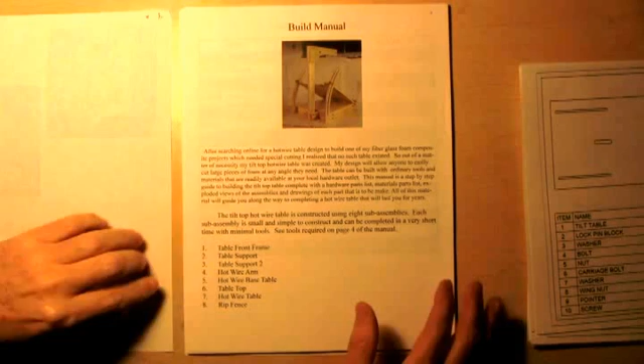And if you take a look at my blog site, you'll see a couple of the different projects that this table was used on. My foam composite trailer for my motorcycle, and also my three-piece triac foam composite kayak. This hot wire table was used extensively in both of those projects. So we're going to flip through here.

The tilt table is constructed of 8 sub-assemblies. Each sub-assembly is small and simple to construct and can be completed in a very short time with minimal tools. There's a table front frame, a table support 2, hot wire arm, hot wire base table, tabletop, hot wire table, and rip fence. This has a complete listing of what tools you need too.

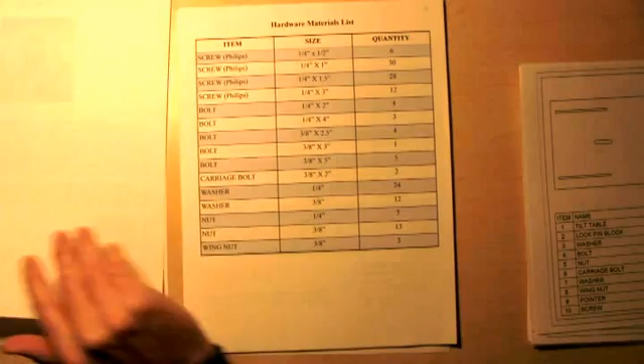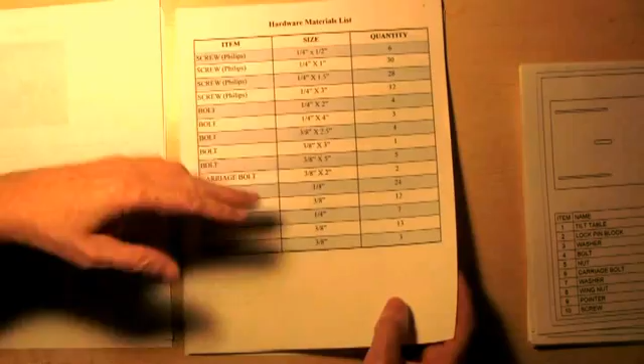This is the hardware list. It shows different screws, Phillips screws and bolts, carriage bolts, washers, nuts, wing nuts. Not a tremendous amount of hardware. Mostly it's wood screws here. I see there's 1/4 inch, 1 inch long wood screws. There's 30 of those. Washers, there's a couple of dozen of those. So again, there's not a lot of hardware in this project.

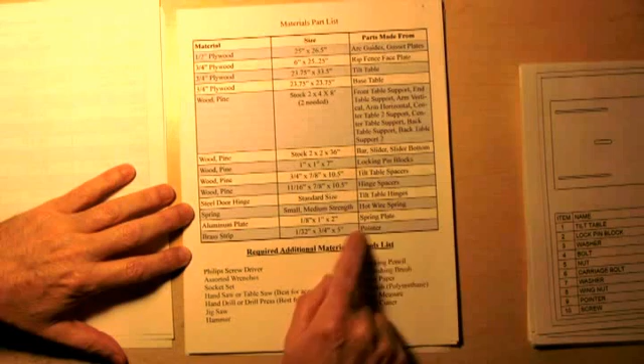Materials here for plywood, you have 1/2 inch and 3/4 inch plywood. Most everything else is made out of stock 2x4s and 2x2s, and a little aluminum plate, and we'll see this when we go through the manual. The pointer is made from a brass strip. Steel door hinge. It's a standard hinge you get from any hardware store.

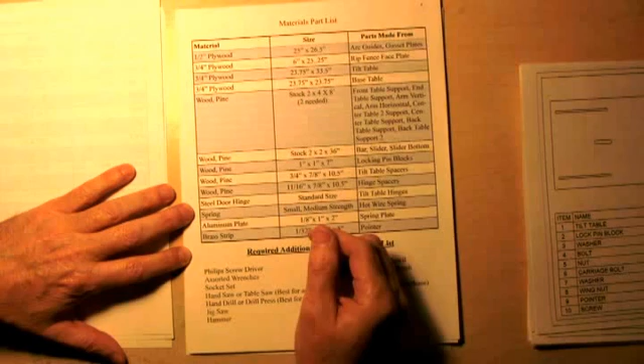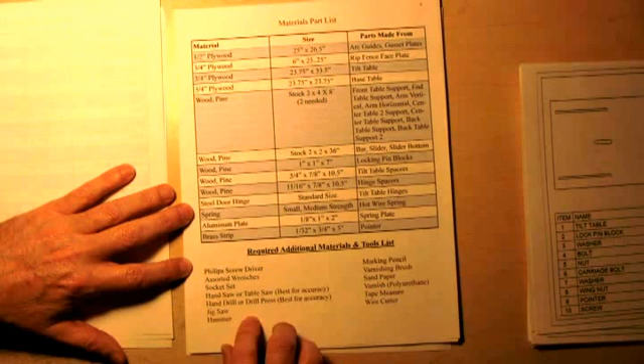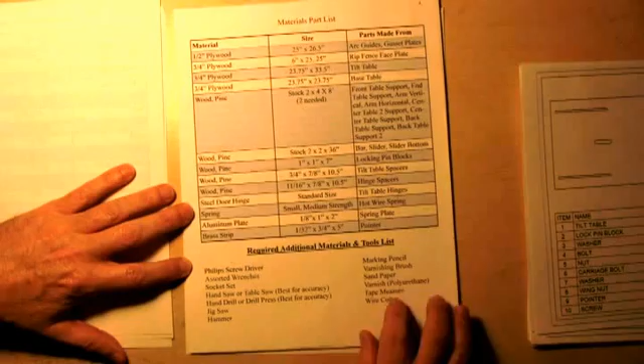And let's see, this is the tools list. It has a Phillips screwdriver, assorted wrenches, socket set, hand saw or table saw, best for accuracy, a hand drill or a drill press, again drill presses would be better, a jigsaw, a hammer, marking pencil, varnishing brushes, sandpaper, varnish, polyurethane varnish works fine, tape measure, and a wire cutter.

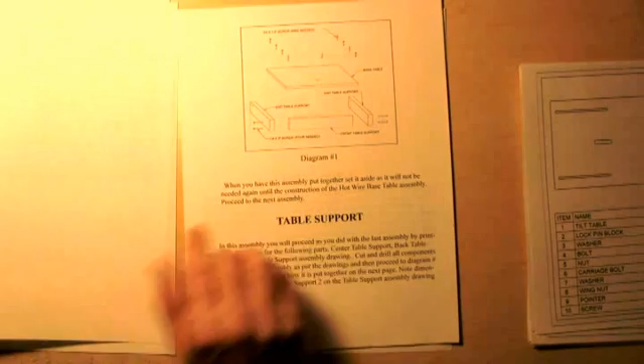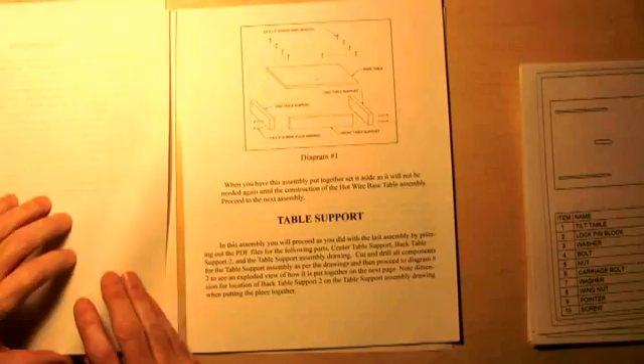This is the table front frame. These are the instructions that tell you what's going on here. And in this manual, we'll go through the drawings along with this. These are all exploded views and different diagrams that show you how to put together the table front frame. And then it goes into the table support. Again, 2 pieces for a table support, couple of screws, real simple construction.

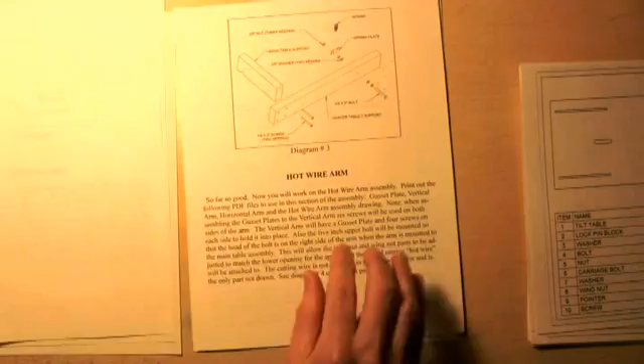Table support 2, same process, only 4 screws and a couple of parts. There's a little spring plate and a spring, and washers, and again it's all diagrammed very well and explains exactly how this all goes together. This is the hot wire arm. Again, it's just a couple of 2x4s and some mating gusset plates. And it's all screwed together, and then it's all bolted to the lower assembly.

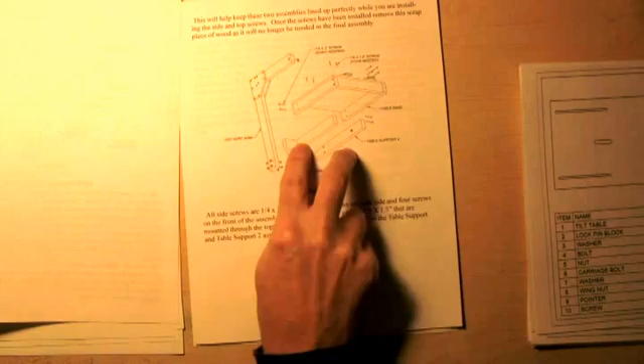This next section is the hot wire base table. And here's the arm again, and then these are the 2 sub-assemblies that we just talked about, table support 1 and 2, and then the table base. And this shows how it all gets bolted together.

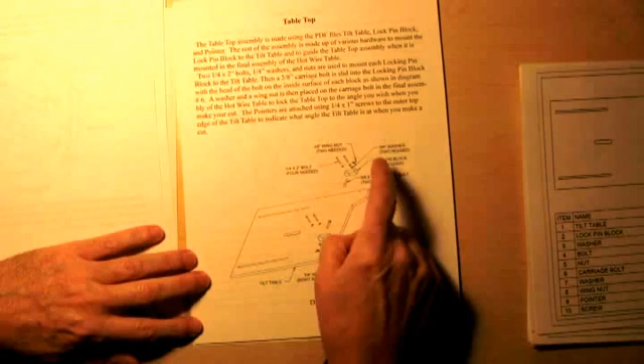This is the tabletop itself. It's the tilt table mechanism itself, and it shows the different hardware that goes into it. 3/8 inch by 2 carriage bolts. There's 2 of them, and then it shows the instructions very plainly here. It's very well illustrated.

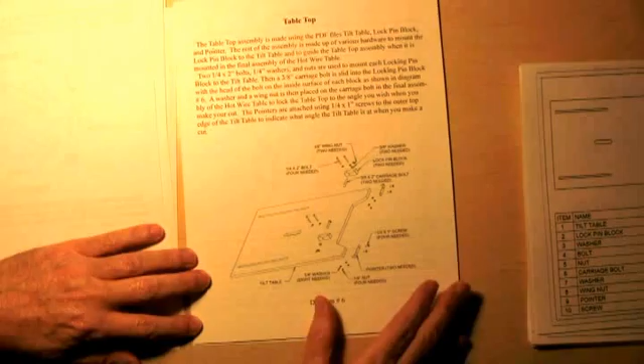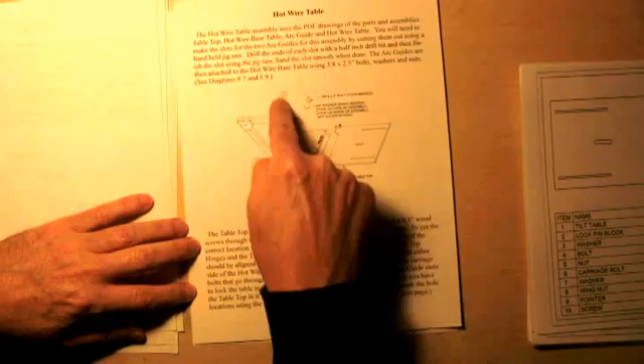This is the hot wire table. Actually, this is close to being built here already. These are the arms, the arc guides to show the angle of the tilt for the bed itself.

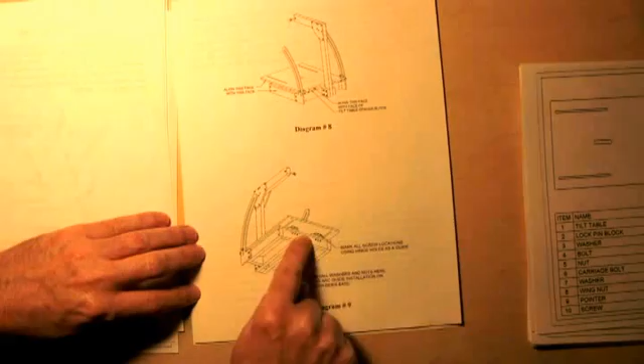Here's a couple more good diagrams of the machine, the hot wire table bolted together and assembled, and shows how to mark the screws to get the screws lined up right so this bed will tilt correctly. Again, another diagram with the placement of the screws and a little block in here to get your height right.

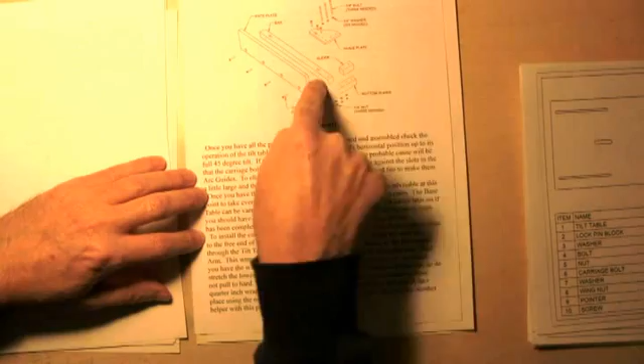Then you go into the rip fence. There's a rip fence on this. Go to the next page here. There we go. Here's the rip fence. And again, it's nothing more than a 2x2 and then a plywood face, and it's all screwed into the 2x2 with a couple of gusset plates and some smaller blocks.

These are just some clips for the wires that come up to power the hot wire table. Some photographs of the arms with the labeling on them, and the little guide. It's just a little metal strip that can easily be cut with a tin snips and bent into shape.

Here's the actual guides. This gets blown up to the size that you need for the arms. And so you take it over to like Copyworks or Kinko's, and they can blow this up to the size that you need. It's not to scale in this drawing, but once you blow it up, as long as you get this an inch wide, when you finish, it'll be the right size that you need. So you got a right side guide and a left side guide.

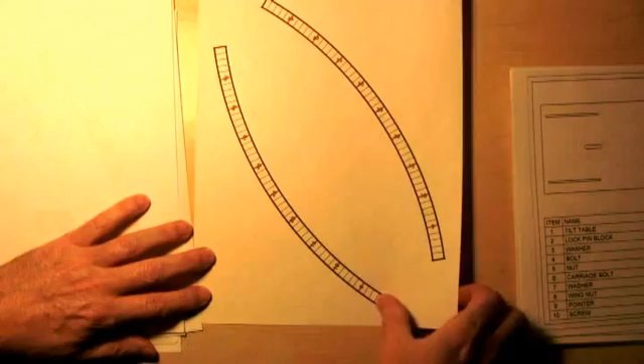And here's another set. It looks a little different. You may like it in color. Again, there's a left and a right, and just scale it up so these are an inch wide, and they'll mate up on the arms very, very well. So it's a very quick assembly from what I designed. And we'll jump forward to the drawings.

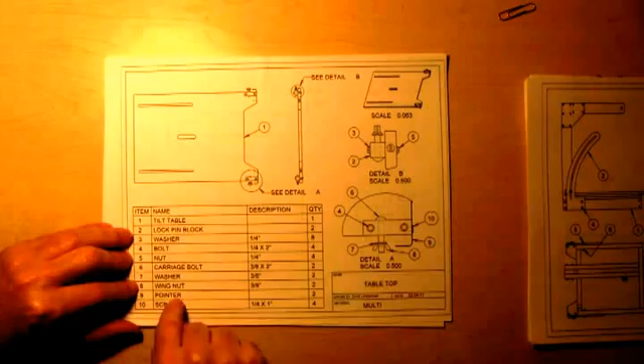In the plans, you have a complete set of drawings showing you all the dimensions for all the parts. This is the assembly drawing of the tabletop itself, and it shows all the miscellaneous components and a listing of what parts go where and how it's assembled. And this is the tabletop, and this is your little pointer. Again, it's just made of brass or aluminum, and you can just cut this with a little tin snips and drill it out, and it's real quick and easy to bend.

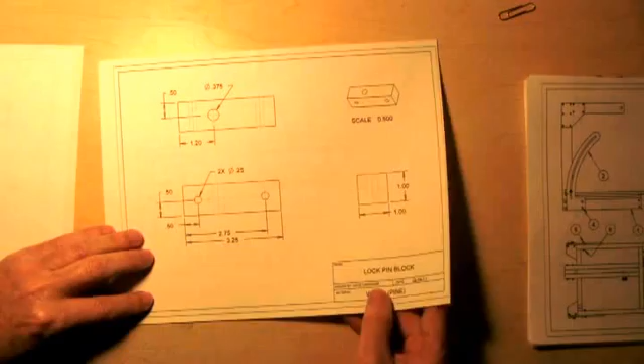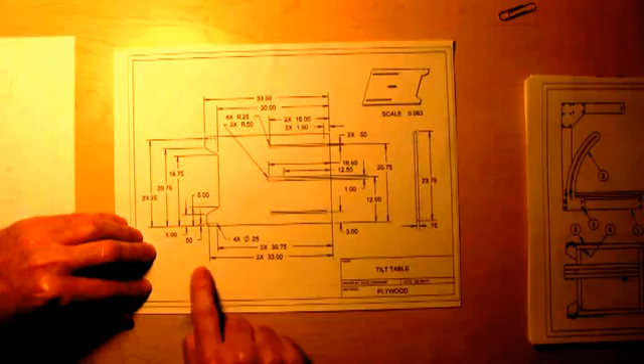Here's some of the locking pin blocks, and these are just made out of pine, and they're 1 inch square. It gives you all the dimensions you need. This is the table itself, and shows the slots that are in here and how far apart. You drill a couple of holes and then take a jigsaw and cut those slots out. Same with this big one in the middle. But it's all dimensioned very well. This is 3/4 inch plywood, so it's a very solid table. So that gives you the tabletop assembly. Let's go to the next section here.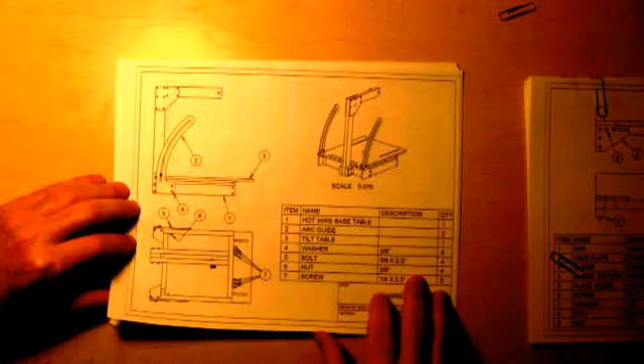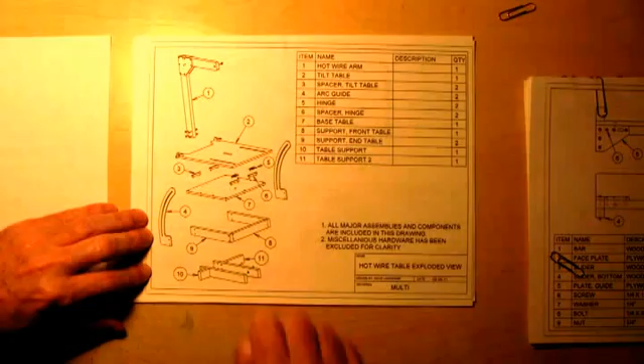This is the hot wire table again. This shows an overall construction of what parts go where. This shows where the hinges are and what various components are in the assembly. An exploded view, and shows the different sub-assemblies that are in it. Here's the framework and the table itself and the arm and the guide arms. Again, more sub-assemblies. Shows where everything is at, so you can take a look at these and get a much better idea how this is all put together.

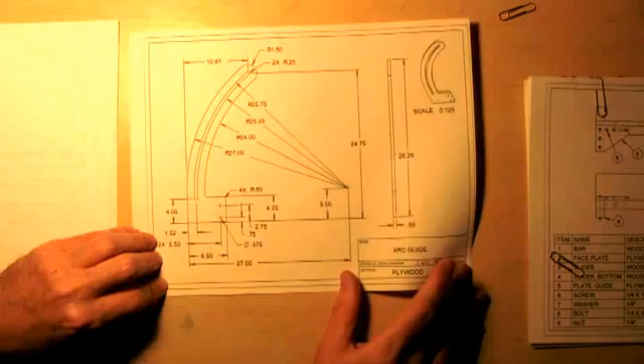Here's your guide arms. Arc guide, actually, there's the correct terminology. And it shows you how to lay this out. Simplest way is to follow the directions: you put a pencil with a string, and you can make these arcs just the way it is. It's all dimensioned, it's all right up to industrial standards, so that you can get something that's made that'll last you a good long time.

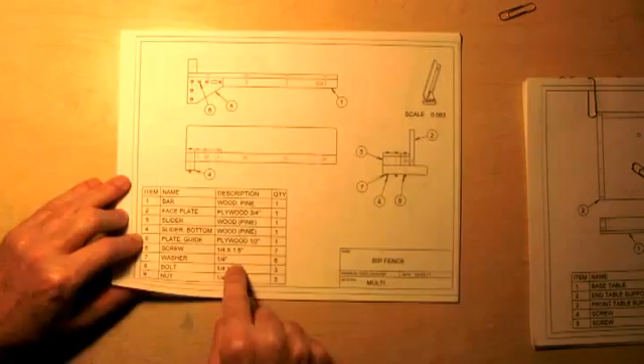So the next thing here we're looking at is the rip fence. There we go, there's the rip fence. We've got, again, a complete assembly of the rip fence here. It tells you all the parts that are in it. And that's a breakdown of each individual component and how to make it. Most of this is made out of just straight pine. Just very simple construction.

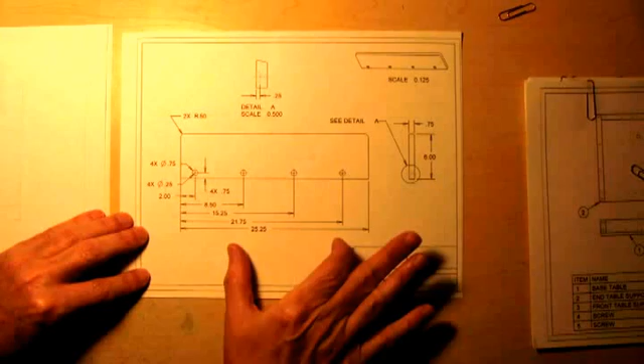This is made out of 3/4 inch plywood, and it is 6 inches by 25 1/4 inches long. Again, it's very well dimensioned. It shows you every last little detail you need to make the assembly. And then the little gusset plates that are 1/2-inch plywood, and it shows all your holes and diameters that you need to drill through to put the screws in and make the assembly for the rip fence.

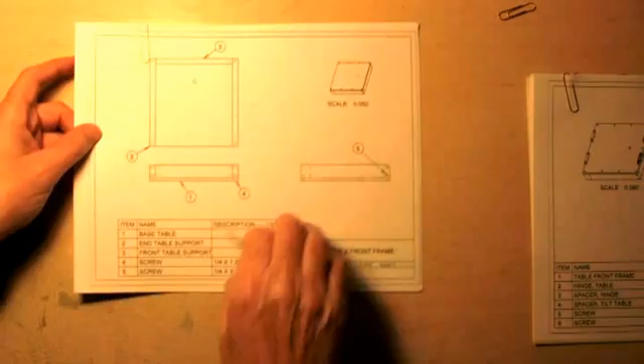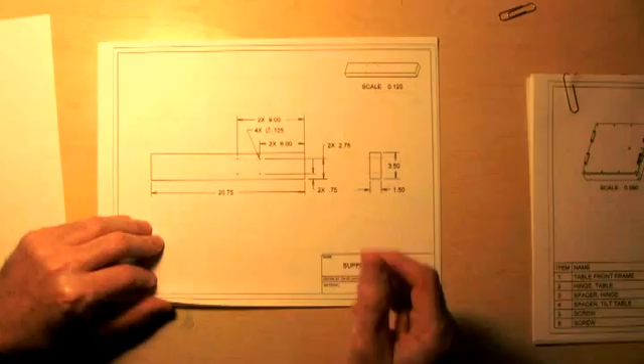The next one here is the table front frame. Again, it shows the entire assembly and a breakdown of all the components in the assembly. And then again, just piece by piece. These are nothing more than standard 2x4s, and this piece is only 20 3/4 inches long, standard 2x4. And then it shows 4 holes that are drilled into it for mounting.

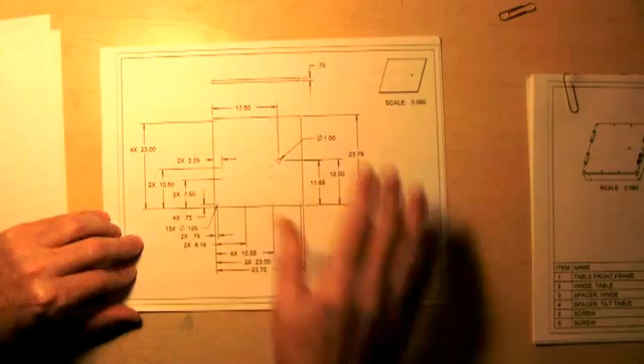This is 3/4 inch plywood that is 23 3/4 inches square. And again, there's a few holes in here that are drilled out. You follow the directions in the manual, and it has all the dimensioning you need to lay this all out. Again, here's the support for the end table. It's just a 2x4 with about 6 holes drilled in it. Very, very simple construction.

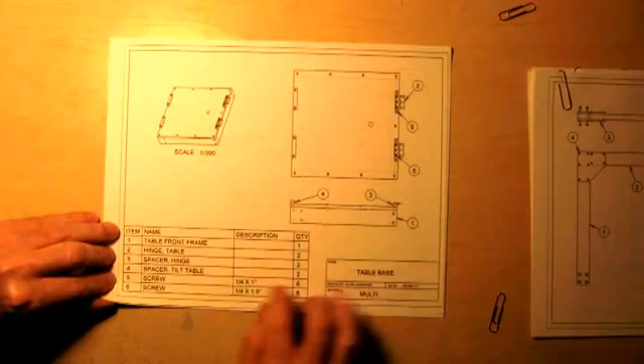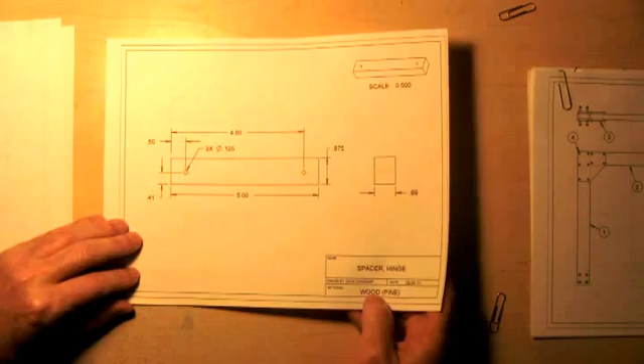The next section is the table base. Again, here's a 3D view of the assembly and all the components laid out. Tells you exactly what's what and a complete description of what's in it. And this is the tilt table itself, a spacer. It's nothing more than pine, and gives you a dimension 0.875. Again, this is all in the manual. Tells you step by step how to do this. But all these drawings help a lot. Tells you piece by piece exactly what dimensions you need in order to put this all together.

Here's your standard hinge, just a regular door hinge. Nothing special. You can buy these over at Lowe's. Get one comparable to this one. If you're off a little bit, it would not hurt at all. It's just to make the tilt mechanism all work. Very, very simple to do.

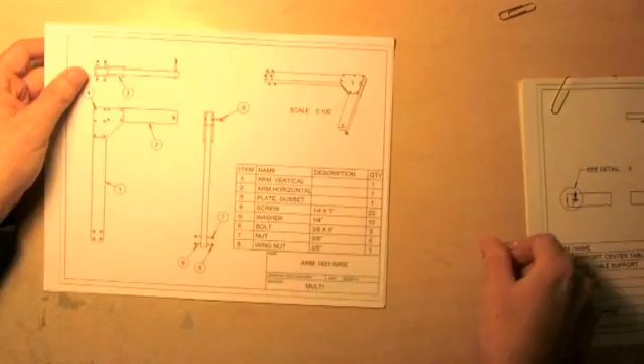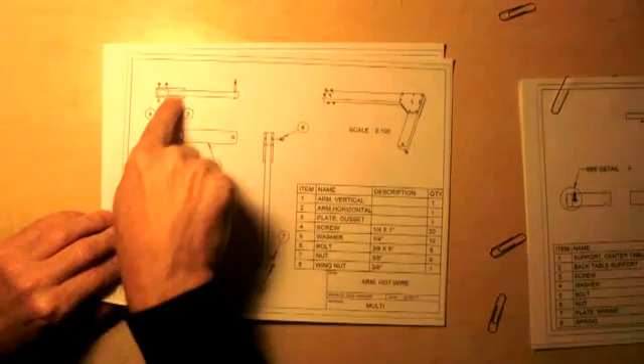So the next section here, let's see what we got. This is the hot wire arm itself. It's an arm like this, and then a wire comes down, so you can cut your styrofoam, and it works very, very well. An arm with a couple of gusset plates. It's just two 2x4s, and then they're bolted through. You can see the bolting that goes on in here. But again, a complete list of what's in the assembly and a breakdown of each individual component, piece by piece. And it's mostly just 2x4s and gusset plates and a few screws and some nuts and bolts down in the lower section here.

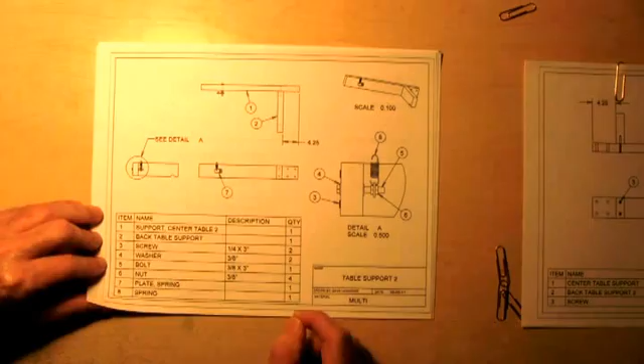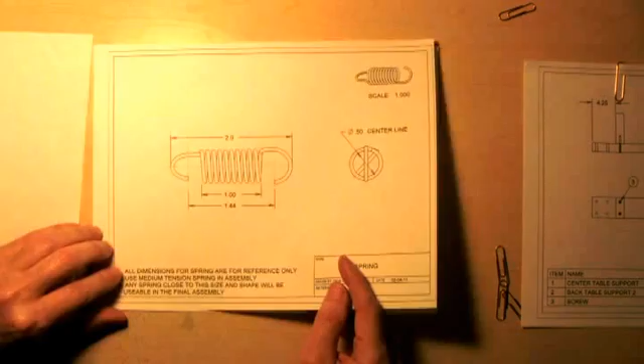This is the table support 2. It's spring loaded. The wire attaches from the arm down to a spring so you can put tension on it. This way you can pull it tight, and it gives you some movement in it, and it works very well. Again, a complete list of what you need: nuts and bolts and washers and screws and a spring, all laid out in the drawings for the table support 2. It gives complete dimensions for the spring that was used, the diameter and the length. And it says any spring close to this size and shape will be usable in the final assembly. So it's not real critical. As long as you don't get something too small or too large, you want it to move somewhat so that you can tighten it up.

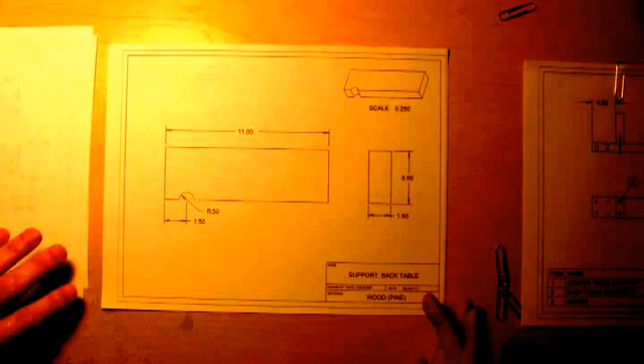The hot wire itself, and there's a little gusset plate, a little plate that you need in the assembly for the spring. And again, just another 2x4 with about 6 or 7 holes in it. And then the back table support. It's just a little half circle cut out of this 2x4. Real simple construction. This is the table support 2, what we just looked at. And the last section here is the table support itself. There's only a couple pieces in this and a couple of screws. They're nothing more than 2x4s, cut to length. And it gives us all the dimensions we need in the drawings.

So that's about it for the plans. And this is again the hot wire tilt table construction manual. The plans have a complete manual and all the drawings, very well illustrated throughout. And only for $20 you can't beat it. You're not going to find a hot wire table that will tilt like this. There just isn't one out there until now.